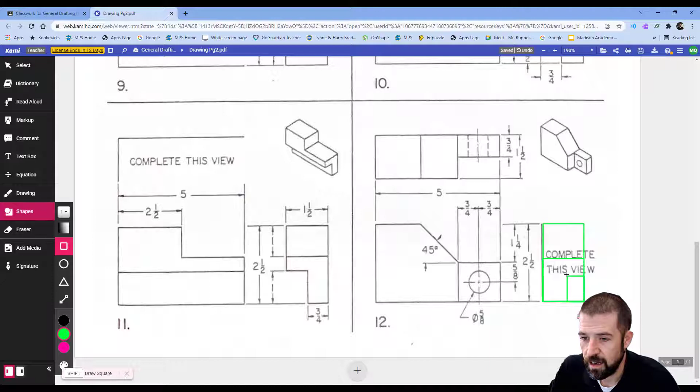The first thing I'm going to do is draw out the view that is missing. On my right hand side I see that shape, I see that, and I see this. And there would be some hidden lines and center lines going through right in here.

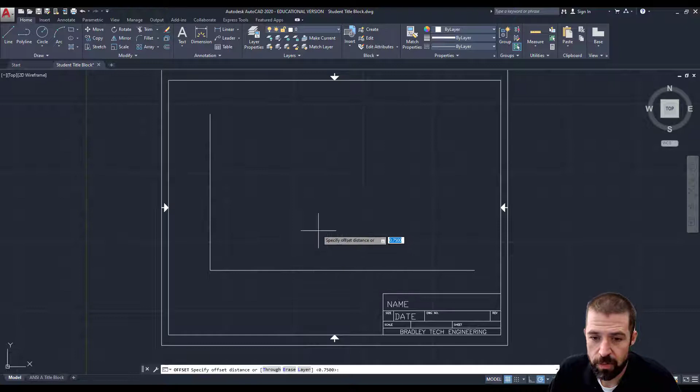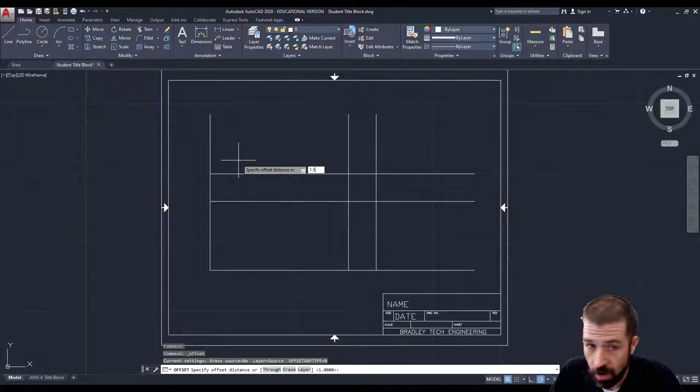With AutoCAD opened up, I'm going to start by creating those 3 boxes. Again, they are the same size for all of the drawings on this sheet. My width offset by 5, offset my height is 2.5. Provide myself some space in between my views, so 1 inch offset. And then I will offset my top view 1.5 inches and my right side view 1.5 inches.

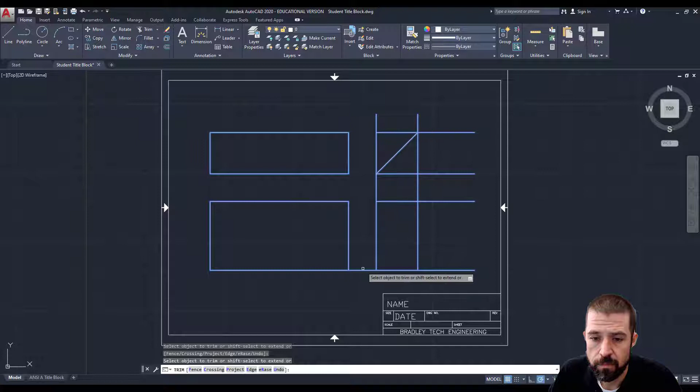Draw my line up here, then use my trim tool and trim out the lines that I don't need. Alright, so there's my top view box, front view box, and right side view box.

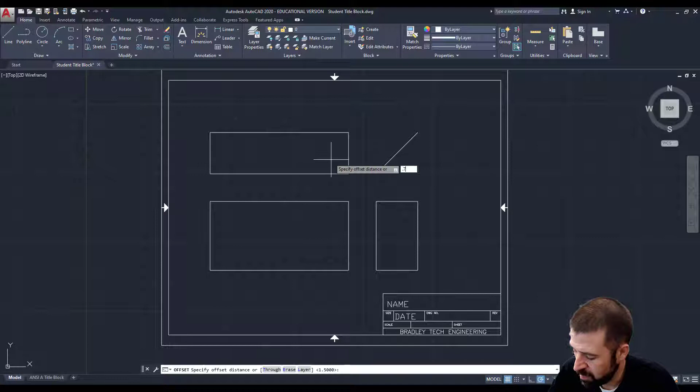I'm going to start by looking at my top view. I can see that this distance here, this thickness, is 3/4 or 0.75. Offset 0.75. I also have a 0.75 on my right hand side.

This distance here is 5/8 twice, so 5/8 and 5/8, so 1.25, from here to here. So offset 1.25, hit enter.

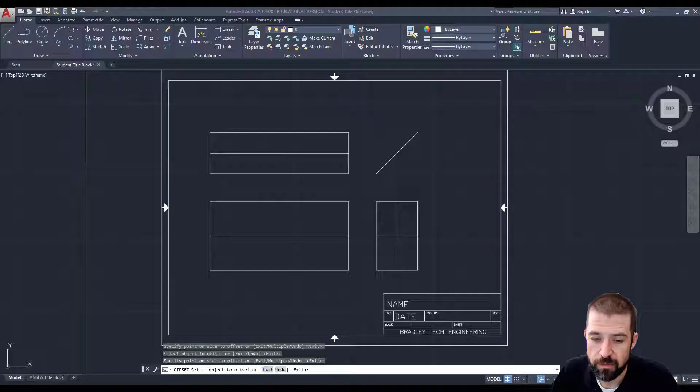The distance of this step here is 3/4 plus 3/4, or 1.5. Offset 1.5.

And then we have a line that goes up this direction at 45 degrees. If you recall, we need to use that at symbol. So I'm going to do a at, we'll say 2 inches, less than, right, we need it to go this way 45 degrees, right?

So what I'm going to do is take that 90 degrees plus 45. Pull out my calculator. 90 plus 45 equals, we need a 135. 135, hit enter. Right, and that gives us that angle.

We can come back now with our trim tool and trim out what we don't need. Looking at my top view, I am going to take this point up to my top and drag it across. Use my trim tool. That gives us this space here, and this angled space here. And I know that from my drawing, this space is cut out.

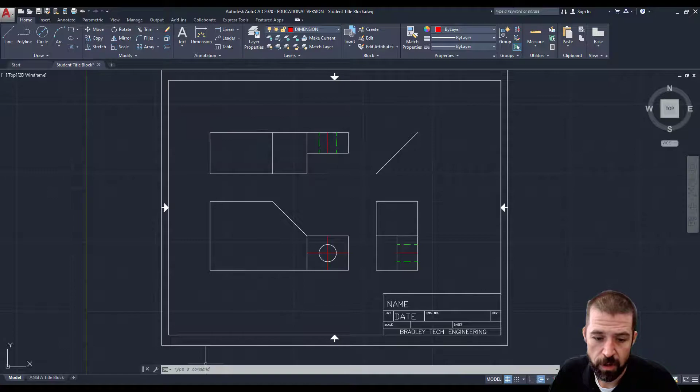And there is part number 12 and drawing page 2. The last thing I'll do then is enter these dimensions. I'm going to start by identifying my overall dimensions. If I look at my blueprint, I have an overall of 5, overall of 2.5, and overall of 1.5.

Overall of 5, overall of 2.5, overall of 1.5. Now I'll come through and enter some of these more detailed dimensions. 1 1/4 and 5/8.

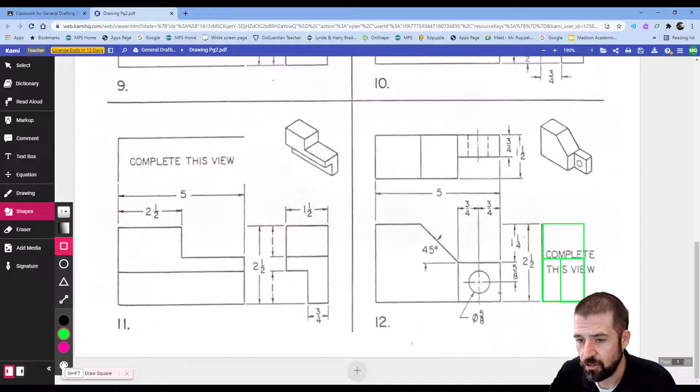I'm going to try to move this out of the way so it's not on top of my object. I have a 3/4 and 3/4. I have a 3/4 on the top. And then I have an angular dimension that goes from here to here.

And that completes part number 12 on drawing page 2. Thank you.